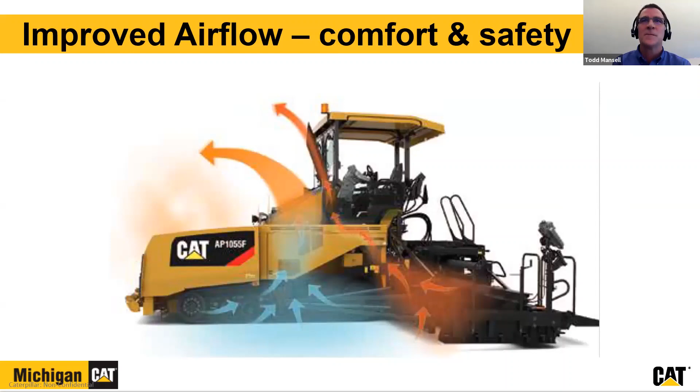Same with the airflow - again, you'll see this with most manufacturers now putting more consideration into the airflow around the machine itself. Fans sucking that hot air and fumes from down around the screed operators and expelling it out the top or somewhere away from the operators on the screed.

Again, just little things to make it simpler. It's one button push now instead of having to push all 4 buttons, unless you only need the auto feed on the right side, for example.

So, a little better safety device now - it's in neutral, but this is for clean out and warm up. It just runs conveyors and augers at a slow speed to get the oil and chains heated up, or again to clean out.

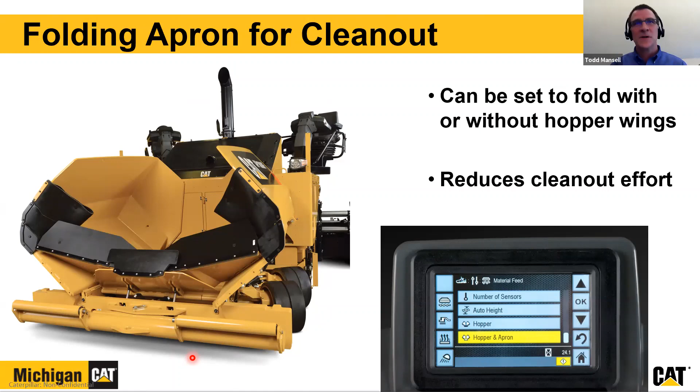So at the end of the day, a lot less strain. Again, I'd say it's a bit more of an ease of work, maybe even a bit of a safety thing if you're worried about somebody putting their back out on that.

And languages - so we've got a lot of crews, and, you know, English isn't always our first language.

For the comfort and quality of the paving we're doing, we've got options of different languages on the operator's console and the screed consoles to help people understand the menus and everything they're going into, and control the operator better if English isn't their first language.

Dual operator stations, nothing big there, that's been around for a long time. What is kind of new in the latest generation of equipment has just become available now because we have CAN bus systems and electronics on the machines. CAN bus, controller area network, basically everything's controlled by computer somewhere along the line. That enables us to do a lot of these features and comfort type things we never had in the past.

In this example, you could have all your conveyor settings, and if you move to the other side on the operator station, all that's carried with you. In the old days, you'd have to go to the other side and then reset your conveyors and feed system and all that stuff.

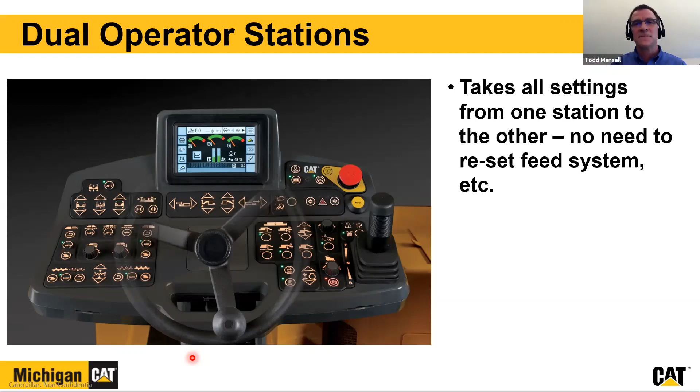Personal preferences, I'm not going to go through all these. Because of computers and CAN bus systems on the equipment now, there's a bazillion things we can go in and customize. Timers are a nice one - we've had these in the past too, but there's a lot more now. We've got timers for delay on the grade control system, idle, throttle up, throttle down, screed vibration - when that kicks in after I leave neutral - we can go spray down. So there's a million things we can customize now, not only for personal preference, but to gear it or fine tune it more to our operation.

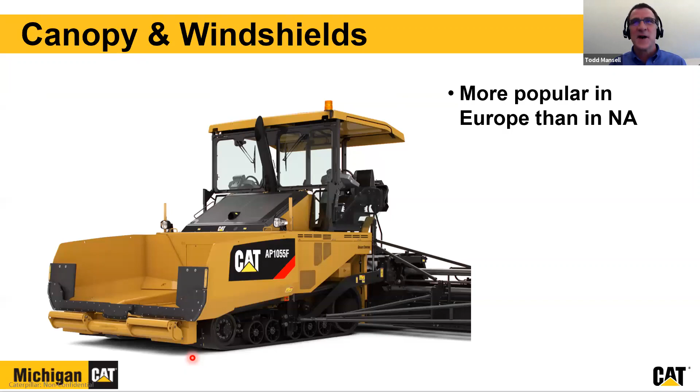Canopies are more of a European thing, but you can get cabs and windshields on pavers. Again, it's just a comfort thing really for operators.

Screed heat has been around ever since pavers have been around, but electric screed heat in the last 20 some odd years has been fairly standard. What we've done here is integrated the generators with the engines now, so they're not a standalone generator. That's really done two things: reduced a lot of fuel consumption for that electric power for the screed heat and other auxiliary power like your lights, and also made the noise levels in and around the machine a lot lower - much lower decibels when you're around that equipment.

Service and maintenance wise, remote grease fittings, and cooling systems that get that hot air out and away from the operators. Variable speed cooling fans - stuff we didn't have years ago on some of the older machines.

Quick change heating elements - this is a big one from a service end. No need to remove the screed plates. These heating elements just slide out and the new ones slide back in, without having to remove and replace screed plates and reset those.

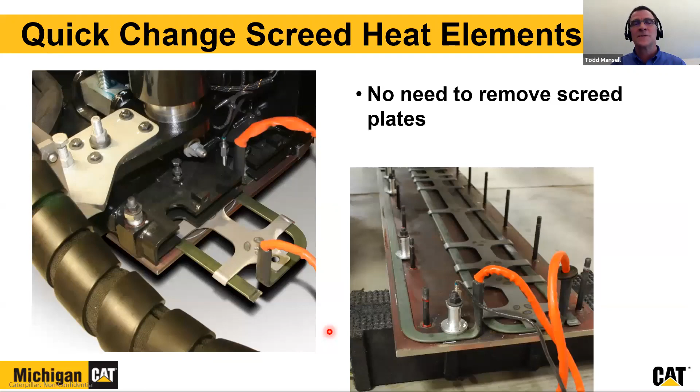Service calibrations, diagnostics - because of computers on machines now, we can do a lot more in terms of diagnosing, or at least helping the mechanics ahead of time. Long story short, the machine will tell us a lot of what's going on or going wrong if something's going bad on us, or if we need to do a calibration, and we can let the mechanics know ahead of time before they even get there. We've got codes, literally written codes, not just a number, but it might say screed heat element or something like that to help out on the service end.

Don't worry, all this electronics kind of scares me too on my new vehicle that I drive, but they still have what I call the limp home features. You've still got mechanical toggle switches underneath the console that if the electronics, propel, steering, any of that failed, you can still run the mix out and actually still pave with it. Wouldn't be real convenient, but you can get rid of that mix and still get the machine, get some trucks emptied, get the machine off the road if you had to.

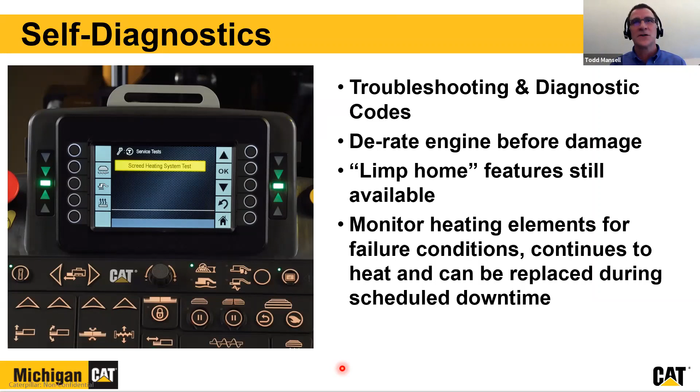Telematics, expanding on what I just talked about in terms of diagnostics, all kinds of information on the machine. When we get to telematics, it's basically remote monitoring. So all of those codes that you can see as an operator on the equipment are also available remotely to the dealership or the owner of the machine. You can log in, get alerts, all that type of stuff online, in terms of product maintenance, and alerts on fuel levels, error codes, all that type of stuff.

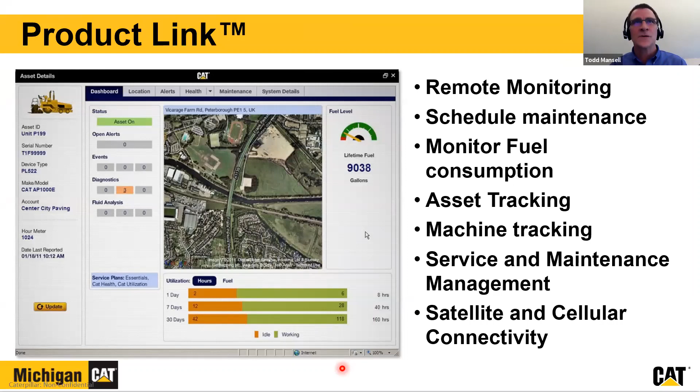Smooth tracks, not a lot to really talk about here. They've been around for a long time. I personally really like the smooth track pavers, good flotation, good traction, and all of that. High wear options for screed plates and floor plates on your paver are available, and all the manufacturers offer that, with even aftermarket versions available as well.

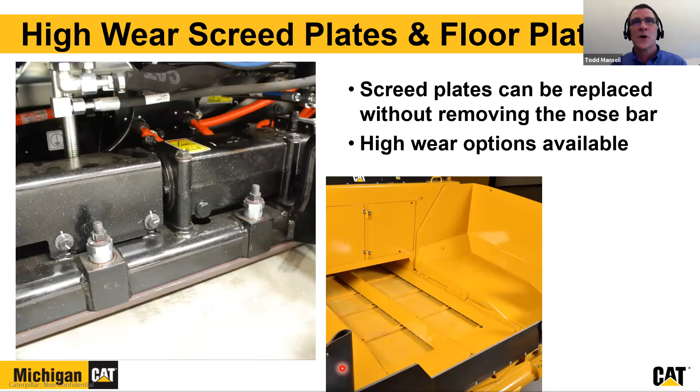One thing I do like here is what we call a lockout feature. On the screed operator's console, we get everything set up and we're paving along. Every once in a while you've got your hand on there or accidentally hit something. The one I've seen hit the most is either auger height, extender slope, or crown. So you can lock those things out, and it doesn't mean you have to have a code to get back in - you just hit the lock button. So if I accidentally hit the crown or something, I'm not going to mess up my mat. You just tap the unlock button and then you can go in and use those features you temporarily locked out. It's a handy safety type thing so you don't screw up your mat by accident when you're paving along.

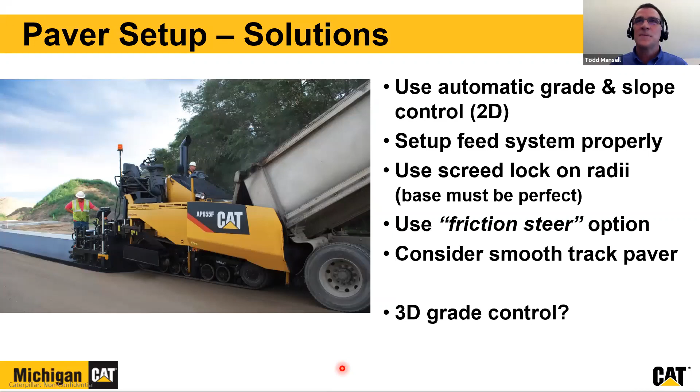On the paver setup, I'll talk about a few things here. One is integrated automatic grade and slope systems - very handy compared to having the left and right screed control boxes that actually had the computers in them. Now with the integrated system, the computer is on the machine. No need to have a left side box and a right side box to keep calibrated with that machine. It just simplifies things a little bit, and of course gives a more simplified user interface.

One thing that's different with the newer grade control system is the operator up top on the tractor can operate it. It's a little clumsy for him to do it, and it's intentionally that way, but they can control it from the operator station, both sides. And of course down on the bottom, you can control it from the left side or the right side. You've got the split screen mode where you can monitor and control both sides on the grade and slope from one side. That's a handy feature - it's a good way to get the guy on the left side fired if you're on the right side and you mess up his grade, but it is a handy feature. If somebody doesn't show up for work one day, or needs to go do something else, you can at least monitor the other side and control it if you had to for a little bit.

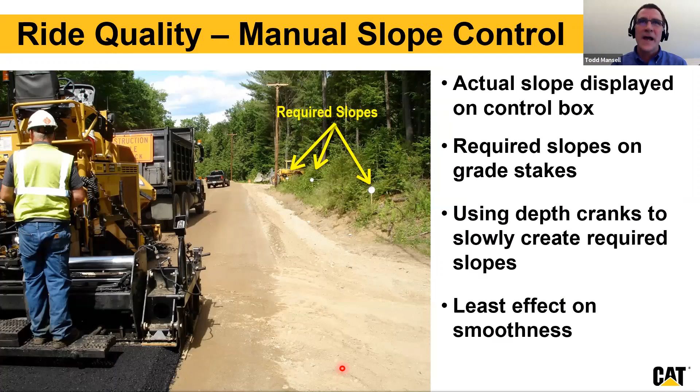Another thing I like with the large displays now on the grade and slope systems is the ability - this guy is just going through a super elevation. He's got pie plates marked out, so he's changing slope manually, but he's using the automatic grade and slope system to look ahead and actually see on the screen where he needs to be. He's looking at pie plates, but he's got the big display now, which we never used to have, so even if he's controlling it manually, he can still view the actual value on the screen instead of dropping his level on the mat constantly, and get a smoother transition. We could do this in the past, it's just easier and easier to do now.

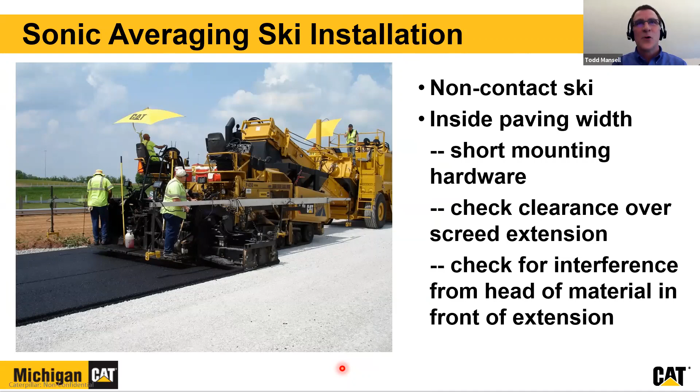Sonic averaging ski, nothing new there, but most of us are using sonic averaging skis now on our machines. They're portable, easy to set up. Big thing here is inside the paving width, whereas when we get to a contact or a drag ski, we're going to be outside our paving width. I've seen jobs where we're running a drag ski on one side and a sonic ski on the other, so you can mix and match. Lots of ways of doing that. But again, there's nothing new. These have been around for years, but I just wanted to cover them on the grade and slope system.

One nice thing from a diagnostics or connectivity standpoint on the new machines is you're able to see everything that's connected. On this screen, it's showing grade and slope displays up at the operator station, the left and right on the screed operator, showing the slope box is connected, showing a grade sensor on the right side, and then the one in red in the top left is telling you that it's not connected. So the machine saw that sensor, it's no longer seeing it. Maybe a cut cable, something shorted out, who knows, but for whatever reason the machine's not seeing it now. So for those of us who remember swapping cables and all that, this makes life a lot faster and a lot easier than going through all that trial and error, trying to figure out if a sensor's bad or a connector or a harness.

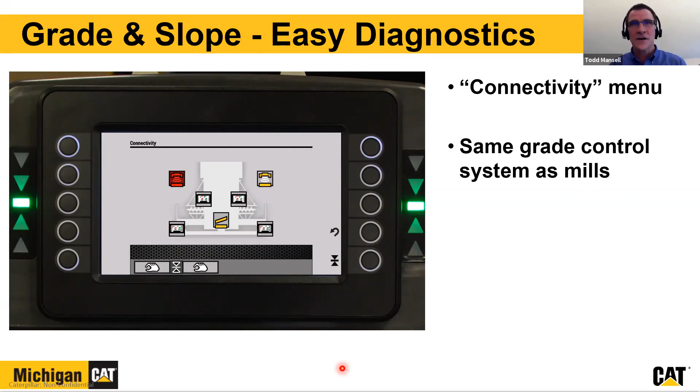There's a busy screen showing a lot of things, but when we get into automatic grade and slope, it's also calibrations. I'm not going to get into the details, but basically the valve tow point cylinder calibrations for automatic grade and slope is a fairly automated process now. We park the paver on level ground, null it out, go into the menu to calibrate that tow point cylinder with the grade and slope system. We only do this once a season, maybe once every time I get on a quote high profile job. Only takes about 10 minutes or so once you get set up and on level ground and nulled out, but it's all automated. You just hit go and it walks you through the menu to calibrate the tow point cylinder with the grade and slope system. Normally we're only doing this if we change out a tow point cylinder, a solenoid, anything wiring to do with the tow point control or the grade and slope system. But I'm doing it on a big job before I get started because it doesn't take long, and it just makes me feel better that my grade and slope system's calibrated to work properly with the tow point cylinders.

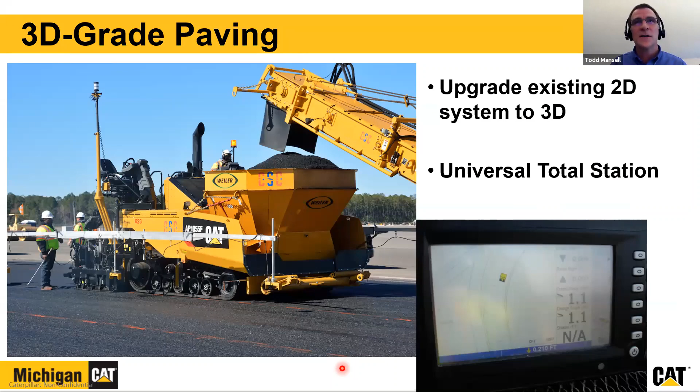3D paving, I know Nars is going to talk about this, so I'm going to skip over it. Just one slide here to show that it is a thing that we're using these days in paving.

Counterbalance puts uplift pressure on those screed cylinders, basically makes the screed a little bit lighter, if you will. But counterbalance is not something we typically want to use. Maybe in a fine sandy mix where that screed settles, or that mix isn't supporting the full weight of that screed. But typically, not something we want to use. If we're getting a screed settlement mark when the paver stops between trucks and that breakdown roller takes it out on the first pass, don't even worry about using counterbalance.

Because every time we use counterbalance or screed hold or screed lock, which is a newer feature on there - counterbalance is on constantly, or 100% of the time when you're paving. Screed lock or screed hold only engages when you come to neutral. So you could use it to minimize the amount of any screed marking or screed settlement when the paver stops, but it's still not a cure-all for a screed settlement mark. You might not have the mark there, but you're also going to have a bit of variation in your compaction, because that screed was locked or held in position until you left neutral and took off again. And of course, paver stops regardless, you've got different temperature zones there where the paver stopped, which will also affect compaction.

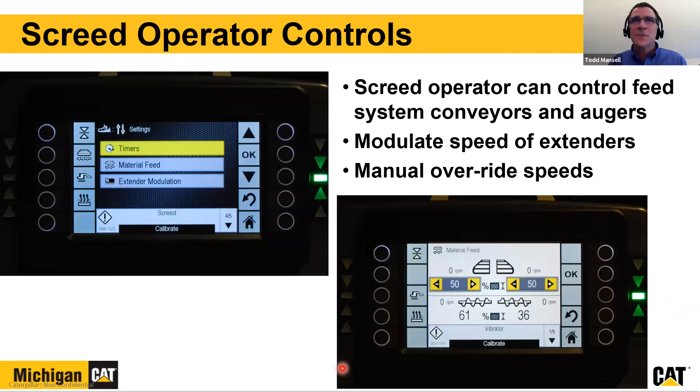Just going to slam through a few of these things. Modulating speed of extenders is nice because when we get to smoothness, it affects how fast you wing in and out.

If we're doing variable width, ideally we try to stay at constant width on a smoothness job. But if we're winging in and out every time I bump those extenders, it affects my IRI. So we can modulate the extender speed to go faster or slower depending on the type of paving we're doing.

I think my picture's missing here, but we've also got the manual overrides. In the past, manual overrides were on or off, and that's still true. If you run the manual override, it's going to bring that mix and conveyors back at full blast.

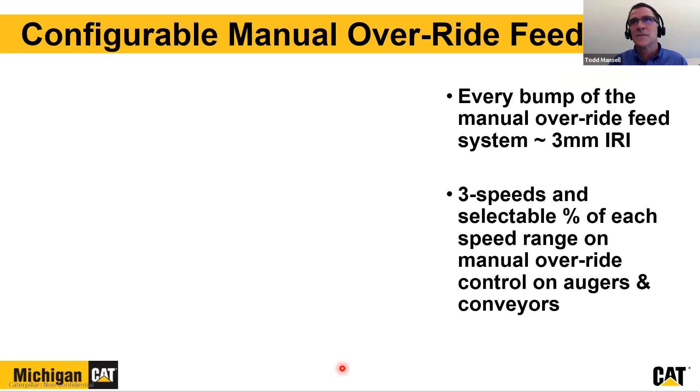But now we can set the manual overrides so that when I do hit it, it's not running those augers at 160 RPM. It's still going to run them fast, but we've got different ranges now that we can select, so it's not as aggressive. It's not actually throwing rocks and affecting our ride quality when we use those manual overrides.

It's got friction steer. That basically locks the steering of the paver at a certain percent of turn, like when we're going through radiuses and things like that. So that's a nice option now to hold a constant radius, or even doing an off ramp or something that's a constant radius, we can lock that.

Feed sensors - I was on a job a week and a half ago, and they didn't have their sonic feed sensors for bringing the mix back. These guys were running their manual feeds constantly all day until they got a new feed sensor.

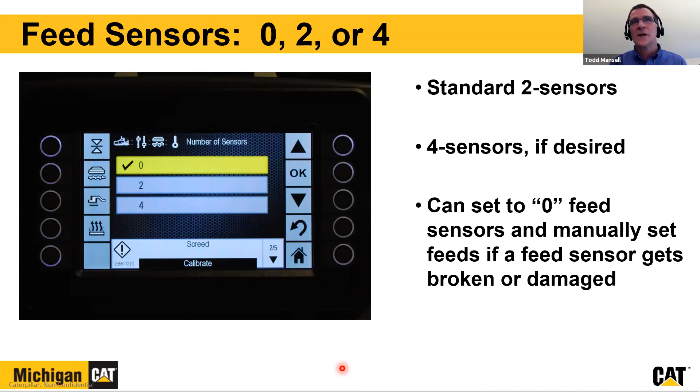Now, on the new machines, you can just set the feed sensors to 0, manually set your conveyor and auger speed, and then you don't have to constantly run those manual overrides and again affect your smoothness.

Lots of different anti-segregation kits and setups, and it just depends on the manufacturer and what issue you might be having. So if you've got centerline striping or different things like that, there's all kinds of different setups you can get.

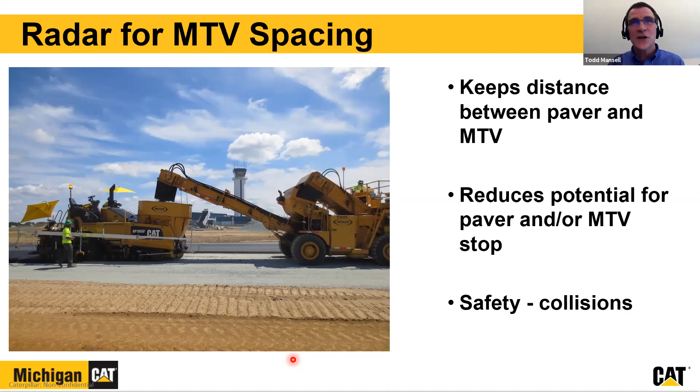The big thing here, you could probably minimize paver stops or even transfer vehicle stops, even though we're using a transfer vehicle. Every time we have to stop the pavers, it affects our quality.

Being able to set our paver speed in advance - on the old machines, you had to speed dial up to your paving speed from 0 when you started out. Now you can preset it before you leave neutral on your initial takeoff, and that's even going to help your takeoff.

Other things, we got wide width kits, and I'm not going to get into the details on this, but a lot of times I see people paving wide on jobs when they should be set up with auger and tunnel extensions for the wide width paving, and kits are available.

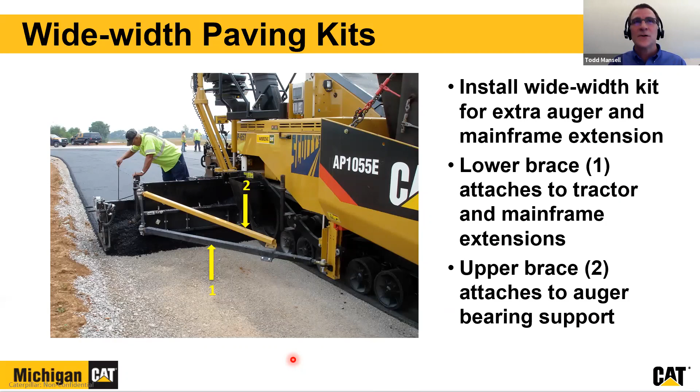And again, it's all about quality, right? So we look down on the top and manage that head of material to half auger height all the way out to the end gate.

And screed heat - I'm just going to skip through this, but it's again more user-friendly nowadays on the new machines because it shows our actual screed plate temperatures as they're heating up, and then they turn green once they're heated up and we're ready to go.

So that's all that electric screed. You turn it on now and you just forget it. The generator, part of the engine, will kick on and off automatically as needed when and if the screed plates need to be heated up during paving. Once we get going, it's pretty much the heat of the mix that's keeping those screed plates hot.

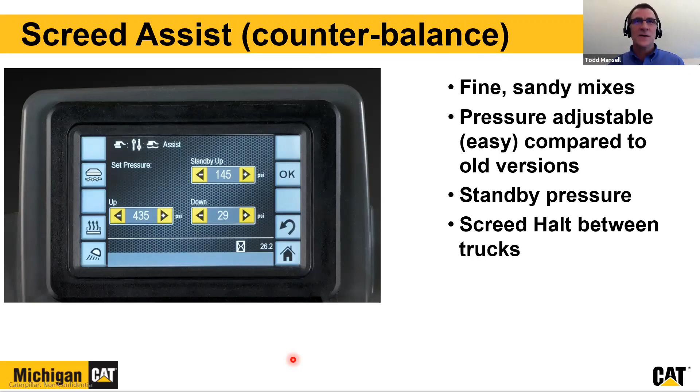There's the screed assist I mentioned earlier, or the screed lock, either function. We can go in and set that uplift pressure, how much we're gonna put on those cylinders that raise and lower the screed, to hold it in place and minimize settling, or to help us when paving that fine sandy mix that doesn't want to support the screed very well. It's configurable, all the pressures, and it always has been, but it's a lot easier now to do from the screen than going down underneath the deck.

Hill hold is a nice feature if you're paving on grades, especially uphill. Once the paver stops, or is pushing a truck and stops, or the truck takes off, the paver wants to roll back a little, and the screed might leave a screed mark in the mat, a bump we can't get out. The hill hold feature holds the brake on for 2 seconds after you leave neutral when you start back up, preventing the paver from rolling back and leaving a screed mark that might affect our smoothness.

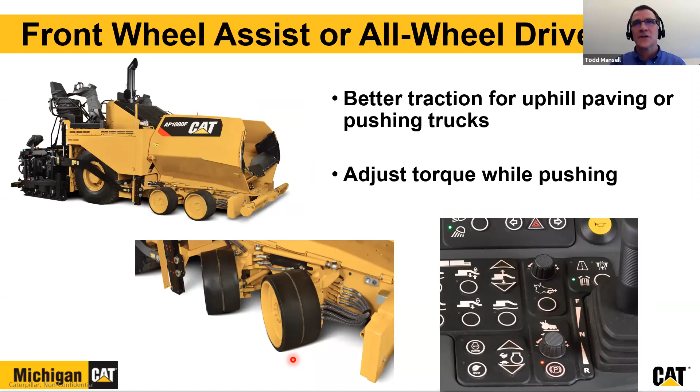Front wheel assist, if you're on the wheel pavers, gives you two wheels, or you've got all wheel drive, which is all 4 front bogies. Again, it's really just for traction, or if we're doing a lot of uphill paving, and you can adjust the torque on those bogies as you're paving to the point where they're not going to slip, so you get the maximum amount of push going uphill.

Low entry hopper is again just optional, whether you get a conventional hopper height or what we call a low entry hopper, depending on the trucks you're using.

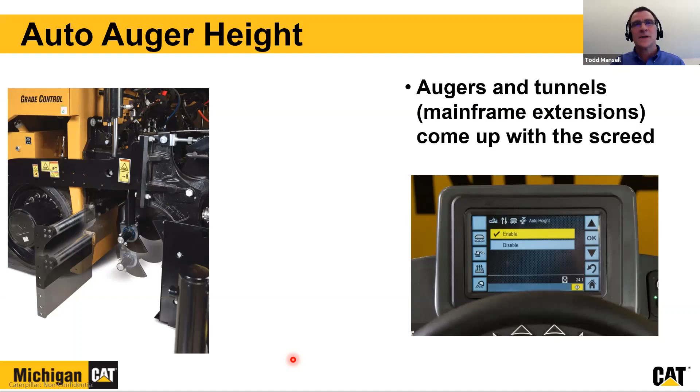Augers and mainframe tunnels have been able to raise and lower together. You get the auto raise and lower, which you can enable or disable, so when you pick the screed up, you're not forgetting to pick the augers up and then hitting something with them when moving the paver, breaking them. I think NARS is going to talk about the screed itself, so I'm not going to get into that.

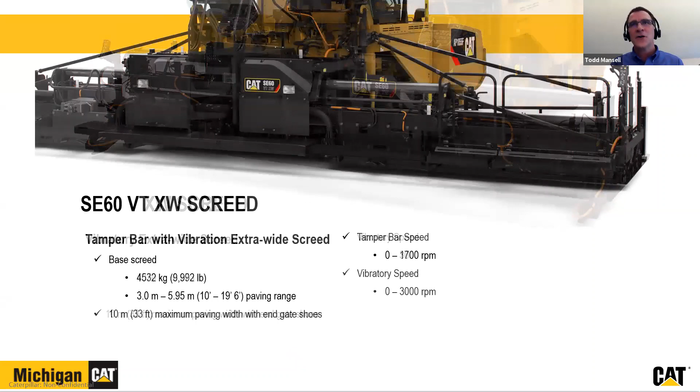A few things quick on the screed, not going to get into details here. This is just showing a vibratory screed. There's a lot of different options for screed widths nowadays. It's got an extra wide, XW, setup. The last one you could go to maximum on this one is 24.5 feet. Get the extra wide setup and you can go out to 33 feet or 10 meters. You can also get tamper screed versions with the tamper bar in them, with speed settings on the tamper. They're more of a European type screed with the tamper screeds.

A few things on end gates: hydraulic end gates are nice, a lot of crews like them. They're fast reacting, or can be fast to raise and lower, as opposed to cranking, and you don't have to get out in traffic to raise and lower those end gates. The heated end gates are nice too, keeping those springs clean so they're always free, so I can keep that end gate down and get a nice longitudinal joint. There are even foldable end gates that fold in behind to help with transport width.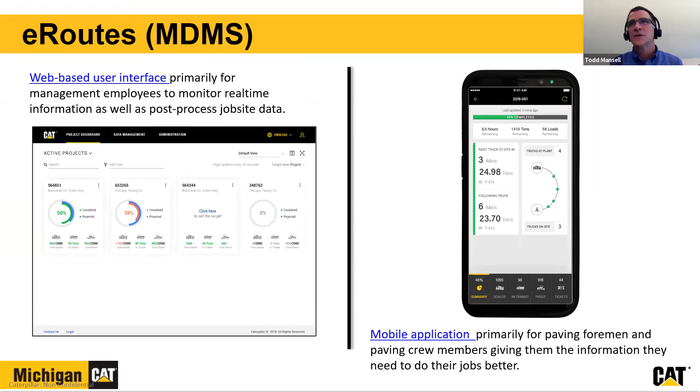A few things quick on material data management. NARS is going to cover this, so I'm just going to blow through these slides. This is one version where you've got the e-routes, with a desktop version and a mobile app version. I'll just say in short, what's really nice about it is it gives you so many ways of managing the job and the trucking in real time.

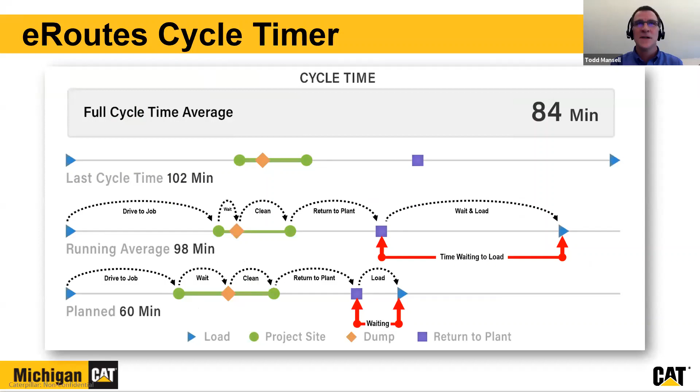And to me, that's really the power of these material data management systems: finding out where loads are, when the next truck's going to be there, all that good stuff. And then there's lots of stuff you can drill down with later in the office to try and improve, fine tune your operation, figure out where the weak spots are, and become more efficient in terms of quality and cost.

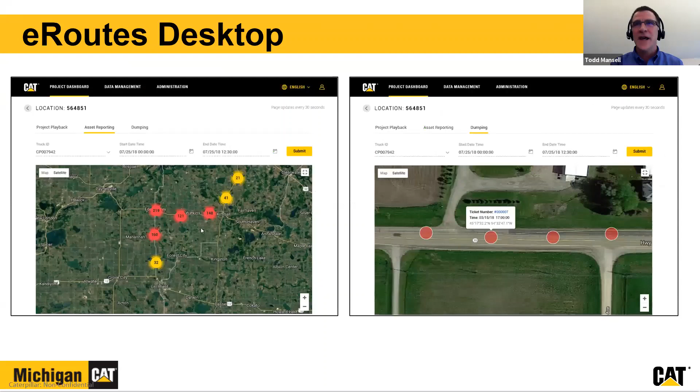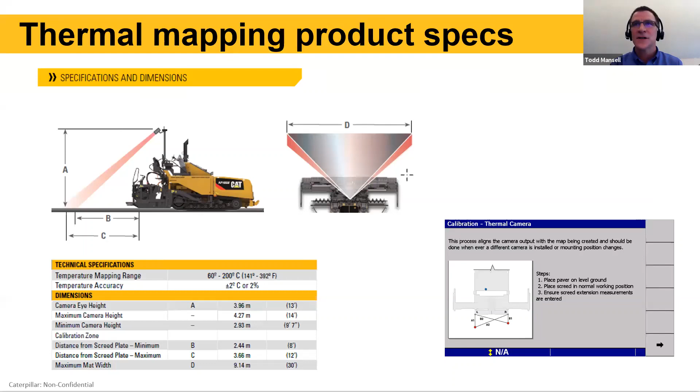Paver mounted thermal, and I'll close out with this. So this is paver mounted thermal profiling. Here we're just looking at a thermal camera on a paver, and specifications like height and accuracy can be adjusted to different paving widths or mat widths. It's an infrared camera monitoring the surface temperature of the mat as we're paving. Again, to me, the power in this is real-time information on the machine while we're paving.

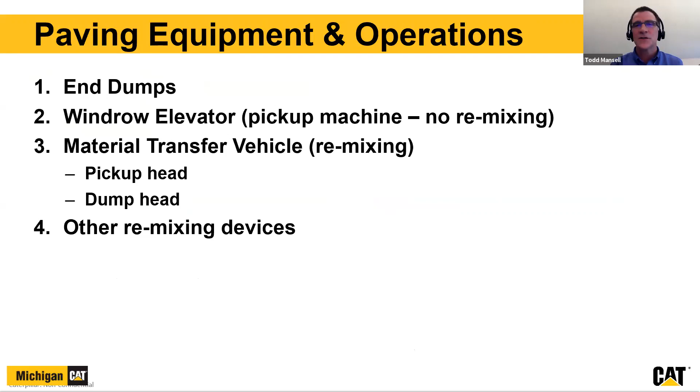I'm not going to go through all the words here because I just have a couple slides I wanted to show you, a few examples of what I've seen or used. Everything here will be available after for anybody who wants to go through all these bullet points. But what I want to point out is a couple examples. With the thermal profiling, I can look at my paving operation if I'm using end dumps, windrow elevator, transfer vehicle, and see what's doing well for me. Because what does uniformity of temperature affect? Uniformity of compaction, right? And our smoothness.

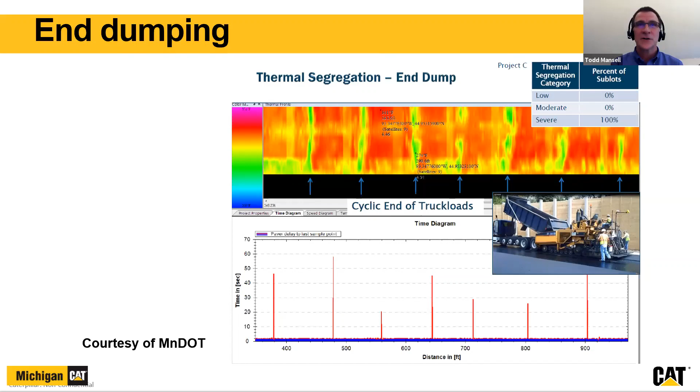So looking at different patterns, this is one from MnDOT, showing paver stops and end dumping. You can look at the thermal data. The low-hanging fruit on this for me is actually just looking at the number of paver stops and how many minutes I was stopped.

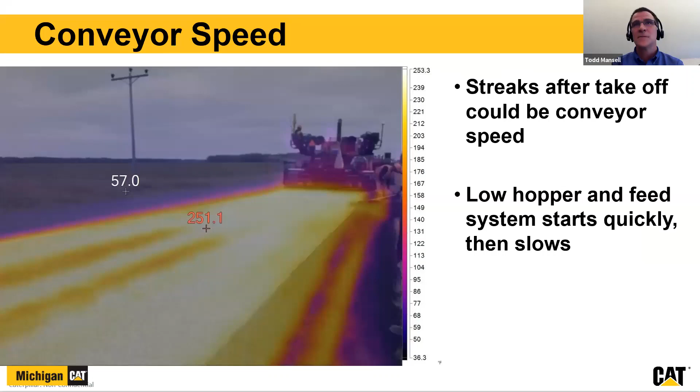And conveyor speed: if I look at a pattern and I start seeing streaks in my mat thermal, I can look back and determine whether my feed system, my feed sensors, are aimed right, like my augers are coming on and off, or my conveyor speeds are too fast or too slow. So there's a lot of things I can quickly pick up about the operation of the paver and the screed, just by looking at that thermal data in real time while I'm on the paver.

So I know I blew through a lot of things there, and I apologize for being fast. But with that, I will finish up here and turn it back to Brett.

So next, our next presenter is Nars. Nars joined the asphalt industry in 1990 as a project engineer with Ingersoll Rand's Paver division, where he led the development of asphalt pavers. He has also held positions with other paving companies as paving applications engineer, product support manager, and product manager. Nars is currently employed with Vögele America as application and technology specialist. His responsibilities include developing product specifications and providing support for paving applications and intelligent construction technologies.

The one thing, Nars, I'll turn it over to you. And I want to make sure the one thing I want to get out of this is how to appropriately pronounce Vögele. You did good. Vögele. All right, thank you. It's all yours, Nars. All right, I'll take it from here.

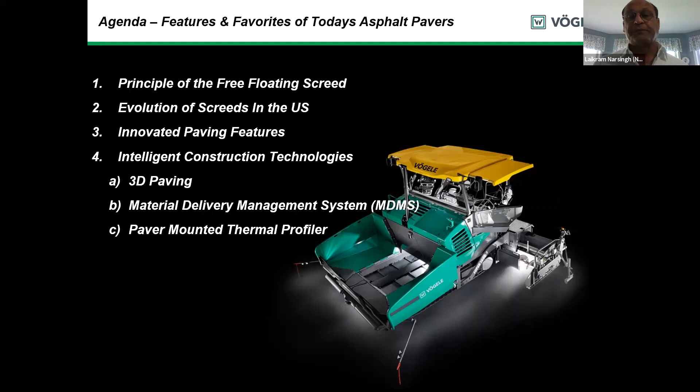So I always like to get back to basics. These are the things that force us to do what we do today: the 5 forces that hold the screed to grade. We all know there is no mechanical or hydraulic lock that holds the free floating screed to grade. It's held to grade by 5 forces.

Consistency is one of the most important things relative to a consistent mat, consistent density and smoothness. The weight of the screed is always constant. The head of material, we always have good controls to allow you to balance the head of material. It's the pull force and the reaction and frictional force that are forcing us to use more technology today to help us manage these forces.

Why are some of these things forcing us to do what we do today? Temperature, like Todd says earlier. Temperature consistency is critical for consistency or consistent performance of the screed and rolling. What's happening when the screed is compacting the material?

If you look in front of the screed, they all have a strike off. The strike off shears off that amount of material, allowing it to flow under the screed. Due to the angle of attack and the radius or bullnose of the screed plates, we get our compaction from that point to that point. What's happening in that process is the larger stones are sliding against the fines, using the asphalt as a lubricant to gain compaction, or to give you your final compaction at the trailing edge of the screed plate. And then, of course, the roller comes along to give you your final compaction.

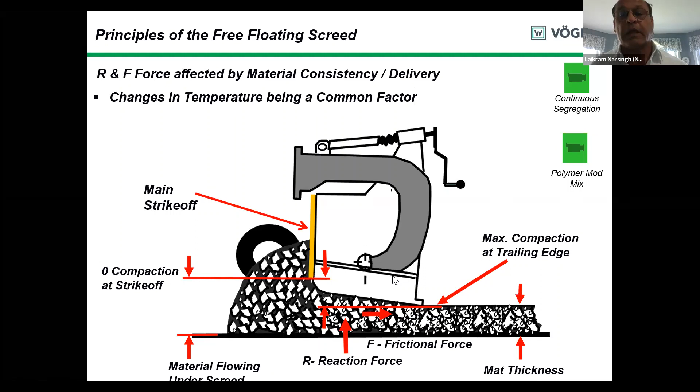If I can play this video and if it will work. I don't know if you guys could see it. As you can see, we're not seeing that, Nars. You can't see it? No. All right, maybe you should unshare and then share that all applications.

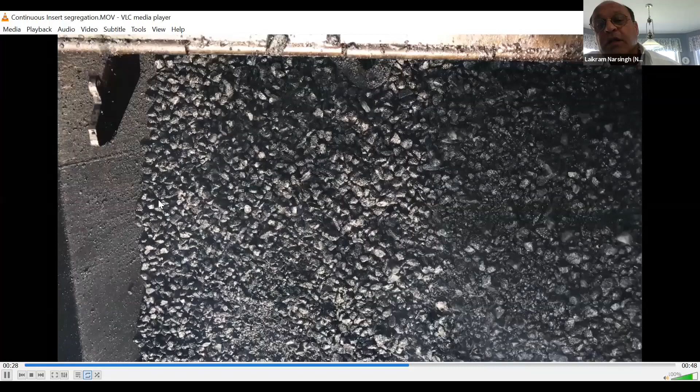Right now, there it is. Yep, so you can see the larger stones are sliding and rolling a whole lot easier because the viscosity is not there to hold it together. If we get into another mix design with more higher viscosity, then those larger aggregates will not roll as much. So that is just looking into what's going on.

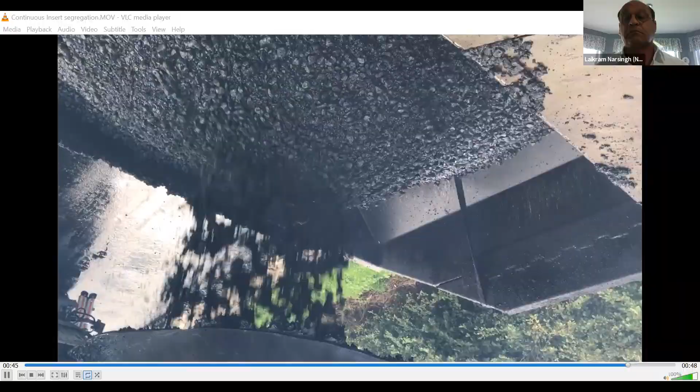All right, I will have to find a way to... I'll get back in there. All right, I hope you guys can see me again. Yep, we can see you.

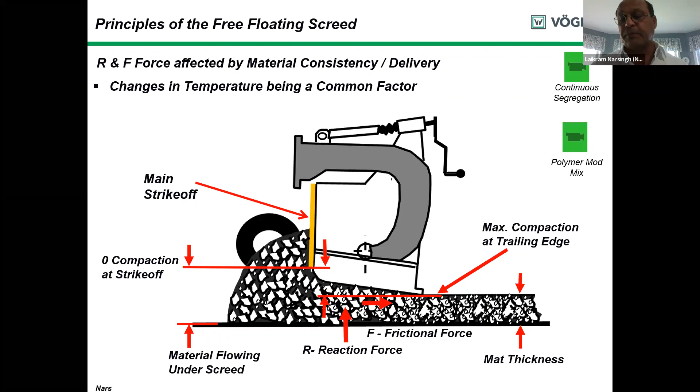Okay, so what's happening there is this: if the temperature changes, the viscosity changes, and the ability of the aggregate to move becomes more difficult, affecting screed compaction and the final compaction from the roller. We'll get back into that discussion when we talk about intelligent construction technologies.

Now let's look at the different types of screeds out there. Today we have two of the most popular types: rear mount screeds and front mount screeds. Rear mount screeds have the extension towards the back of the end gates. One of the big challenges with these types of screeds is when you're doing commercial type work and constantly extending and retracting, it's difficult to manage this material to allow you to retract if you're running out to catch a driveway or around a mailbox or an island or anything like that.

You also have a much longer end gate, so your handwork tends to increase more significantly when you're doing commercial type work. These are referred to as front mount screeds, but equal width front mount screeds, where the front to back dimension of the extension is the same as the front to back dimension of the main screed.

But you have a much shorter end gate, so from that standpoint your handwork is minimized. However, you have material management to deal with in the middle here, as opposed to a rear mount screed where it's out here - you can see it, you can manage it, you can shovel it out. In this case, you can't.

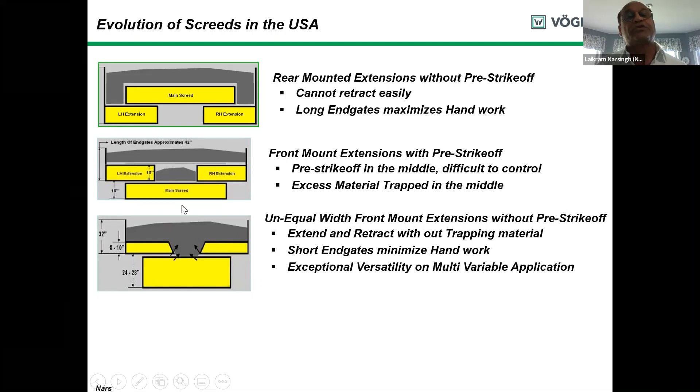So this type of screed has evolved into what we refer to as unequal width front mount screeds. These have a much narrower extension, so there's no need for a strike-off in the middle. And if you notice, the inside is tapered, so as you extend and retract, that material pushes forward and does not get trapped. This seems to be the most popular screed today.

In the past, there was always a perception that these types of screeds are not real screeds. Well, if you recall the 5 forces that hold the screed to grade, weight of the screed is one of them - not weight front mount or weight rear mount, just weight. As long as the screeds are rigid enough, the performance in terms of smoothness and density is no different whether it's front mount or rear mount. The advantage is versatility.

These are referred to as compaction and high compaction screeds. Compaction screeds have a tamper bar, a moving device that sits in front of the screed and moves up and down to give you compaction. High compaction screeds have the tamper bar and also multiple pressure bars at the back. With these types of screeds, you can achieve up to 100% density.

Now, with a high compaction screed, you could pull 2 lifts at the same time. One paver with a high compaction screed in the front, doing your binder 3-4 inches. A second paver roughly 4 feet behind the first, laying your surface mix. The paver in the front has a transfer conveyor sitting on top of it, which transfers your surface mix over to the paver at the back. That type of technology is being used in Europe today.

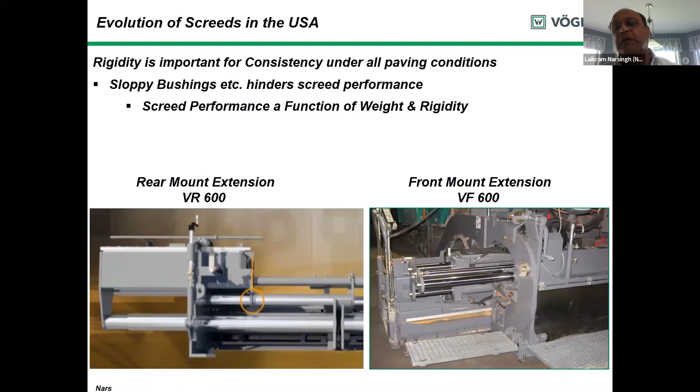So rigidity is what's important, whether it's front mount or rear mount screed. If you have rigid guide tubes with no sloppy bushings, the performance will be the same as long as the weight is there and all the adjustments are correct. So whether it's a rear mount screed, you can pave up to 28 feet wide, pulling 2 lanes. Whether it's a front mount screed, you could pull 28 feet wide again, doing 2 lanes.

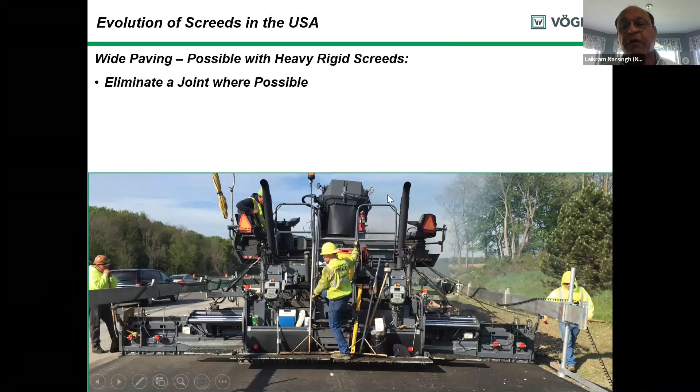This is a project through Columbus, Ohio, pulling 2 lanes at the same time with a front mount screed. Same with a front mount screed, pulling a 7-foot shoulder together with a 12-foot main line. So if you have the rigidity and the weight, you can pull 2 lanes, you can pull a shoulder in the lane, you can eliminate a joint, which we all know is the first place to have failures.

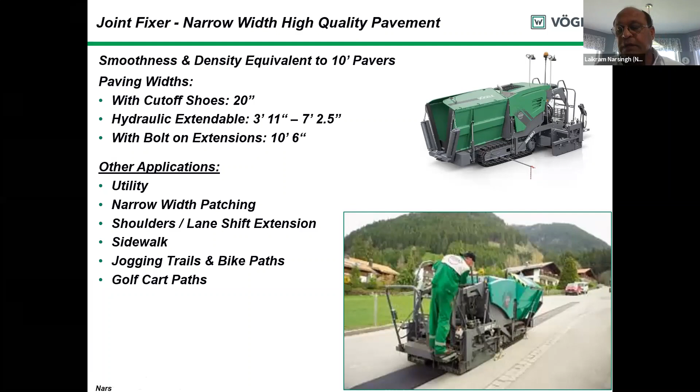If you do a bad job and you have to fix it, then we have the fixer-upper paver - a high quality, narrow width paver that could pave a minimum 20 inches wide, so you can mill off the failed joint and put it back on with a high quality screed, 20 inches wide. The same paver could also go up to 7.25 feet wide, or with some bolt-on extensions up to 10.5 feet. It can be used for different applications: utility patching, narrow width patching, shoulders for lane shift during construction, sidewalks, jogging trails, golf cart paths. So all of it becomes available with a narrow width, high quality paver.

So those are some of the slides to describe what we do with screeds today in our industry, from front mount to rear mount, compaction, high compaction screeds.

Now we'll look at paver controls, past and current. In the past, we had toggle switches, hydraulic joysticks, a few toggle switches in the screed. That was about 30 years ago.

Today, we have what we refer to as intelligent machine controls, more than likely CANBUS control. With that, it allows us to perform intelligent construction that the feds are pushing, referred to as intelligent construction technologies. Whether it's a tractor control or a screed control, it's all intelligent machine control.

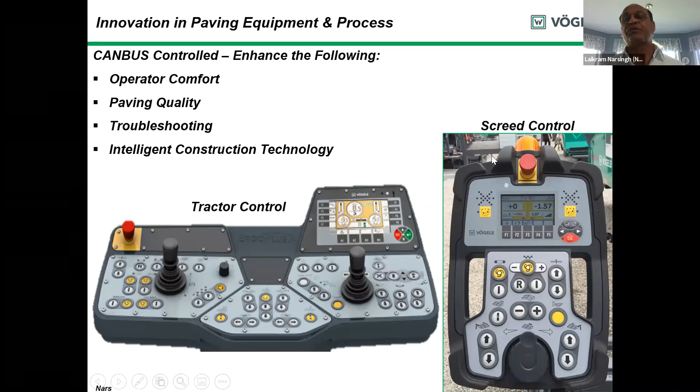With CANBUS control, we can improve operator comfort, improve paving quality, improve troubleshooting. We all know when a paver goes down, we have 10 trucks in front of it. It's very important to get the paver back up and running to save those loads. And that will allow us to involve intelligent construction technology on your screed control and tractor control.

We also give you a remote control. You can hold it in your hands and walk along the paver and perform all your paving functions. Get off the heat, get off the vibration. No need for you to stand there. I'll come back to this control a bit later to show all the different functions we have on it.

Here you can see we have duplicate auger and conveyor, toe point up and down. If you're an automatic grade and slope control, this allows you to increase or decrease your mat depth. We have screed extensions, hydraulic tunnel, berm. If you're in berm country, Michigan is berm country. We have slope, match height, and lockout for all those functions.

So if you accidentally hit the switch, it sees the function. It's mounted, it's magnetic backed. You could mount it anywhere there is steel, but there's a bracket on the end gate. So you can walk along the paver, grab it, move along the paver, and perform all your paving functions.

What are some of the other technology we have that makes your life easy? Cummins Tier 4 technology, 250 horse, no DPF, but it has a DEF and an SCR, no DPF, which means no need to bother about regen for a DPF.

You also have an economy mode, 235 horsepower at 1700 RPM, reduce noise, reduce wear and tear, but enough horsepower to get all your functions, all the paving functions.

We also have a hydraulic driven fan controlled by the coolant temperature, air temperature, that allows you to again reduce noise, reduce wear and tear, and reduce fuel consumption. We also have a clutch that's between the pump drive gearbox.

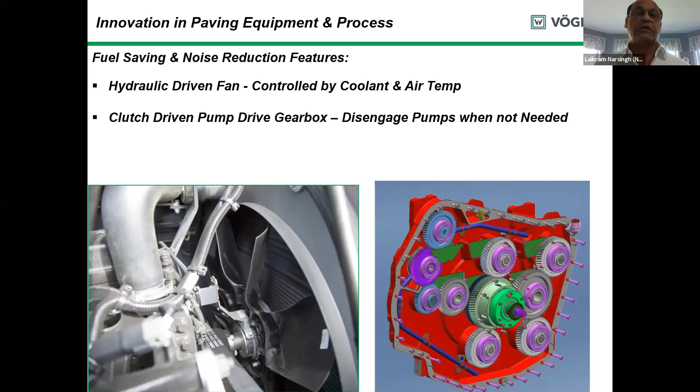Some ease of operation features, trim steer. Todd talked earlier about the brake on the steering wheel. Similar feature, ensures smooth radius in turns. Why do we want that? If we're zigzagging through the turn, then our screed is moving side to side. We break those five forces in equilibrium, we end up in a rough ride. So it's always important to hold a nice smooth turn into a nice smooth radius into a super elevated turn.

Same control, display your head of material. As you run low in your tunnel, you see your bar chart gets empty. That means you're low and should stop paving. One of the things we talked about earlier is your material delivery management system to ensure consistency of material feed, and again to keep those five forces in equilibrium.

Also displays the toe point position to avoid twisting in your screed when you're setting at the joint. So your toe point is being displayed up here. Also on your screed control, you have the same display so the operator can see exactly where his toe points are at to avoid twisting.

Screed hold and screed freeze. Whenever the operator pulls the F&R lever to neutral, the screed goes into a hydraulic lock so you don't have any settling. As the operator takes off, the screed stays locked for about 4 seconds or 18 inches, so it does not give you a hump.

When we stop, like we said earlier, the temperature, the mix gets cooler, the viscosity gets stiffer, and your reaction force increases. So with the screed freeze, it holds the screed to grade and prevents it from climbing as it goes through that colder head of material, and does not give you a hump.

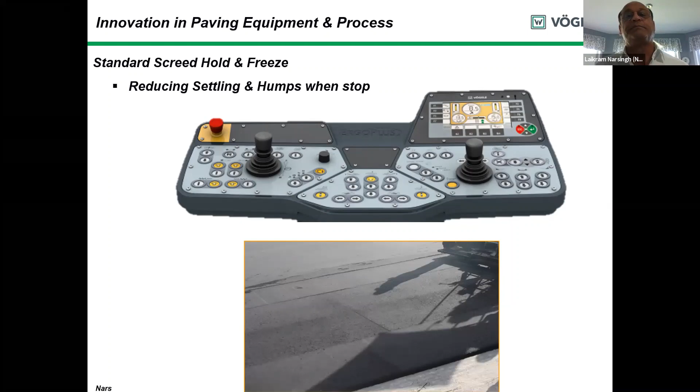Track plow, makes it easy on you. You don't have to step in front of the tracks with a shovel when you have piles in there. You just drop it in the morning, pick it back up in the afternoon so you don't run over curbs and tear it up. It's a simple tool that allows you to achieve a smoother ride with less work.

So those are some features on the paver that help you perform a better job and improve on quality and smoothness. Now we'll look at some innovation in paving equipment and process.

A material management system we'll talk about a bit later. For ease of operation, you have automatic, manual, and on-off controls for your auger and conveyor in three different locations: on your tractor control, on your screed control, and on your remote control.

We also allow you to set your material height. It's hidden at the back here on the auger sensor, so you can set your material height at that position, and you can also set it on the screed control. Whenever you hit the plus or minus sign, the screen that shows your percentage automatically pops up so you don't have to flip through screens to find it.

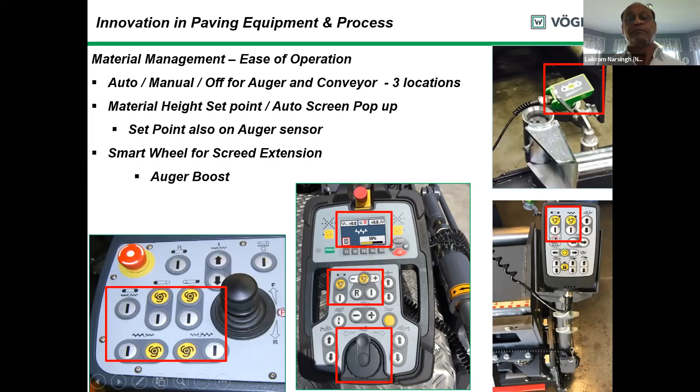We also have the smart wheel that allows you to slowly run your extension in and out if you're trying to match a joint, so you don't disturb those five forces in equilibrium again. Or if you're going out to catch a driveway, you hold it down and it doubles your speed and also boosts your augers, because it knows you're going out and need more material, so it kicks your augers up an additional 40% if it's not already at max.

So those are some of the features that help you with material management.

Again, for ease of operation on the operator side, there's a hydraulic tunnel so you don't have to go in there and clean that front up with a shovel constantly. You just touch the center switch and it pops that front apron up about 60 degrees and dumps that material back into the flight chain. You could individually run each hopper, or if you hold that switch down constantly, the front will come up and then your two hoppers will come up. Makes life easier for you during the day.

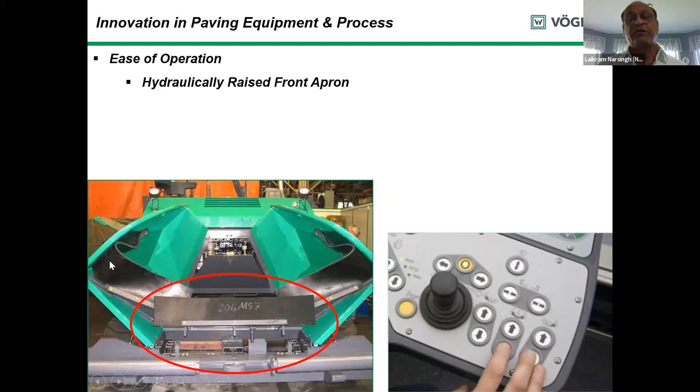Another feature that helps you reduce your effort at the end of the day is an automatic greasing system that greases the feeder bearings, just the feeder bearings.

Some diagnostic systems we put on the paver. Why? Because we know the paver will go down—it's built by human beings. But if it does go down, we give you easy access to all the valves. Open the side door, one on each side. Each valve has an LED light that comes on if you have a complete electrical circuit. We all know 8 out of 10 times when a paver goes down, more than likely it's an electrical problem. So we give you a diagnostic system built into the machine, no internet service required, no laptop required, no license required. It's all there—you just need to learn to use it.

So most pavers have, like your car, you turn your ignition key on and a bunch of sensors will tell you whether the function is good. Your second level of diagnostics is for certain problems, it tells you what it is. If the problem is fixed, it gives you an X. That's a nice feature when you have intermittent problems, so you can constantly see when that problem occurs. Again, when it's fixed, it will be X'd out. If there's no X on it, that problem still exists. That's your second level of diagnostics.

Your third level of diagnostics, if you remember the control panel, you go to a switch and hit it. If the circuit is complete from the switch to the input pin of the controller, the circle will go dark. Let's say your extension is not working—here's my extension switch. If I hit the switch, the circle will turn dark if the circuit is good from the switch to the input pin of the controller.

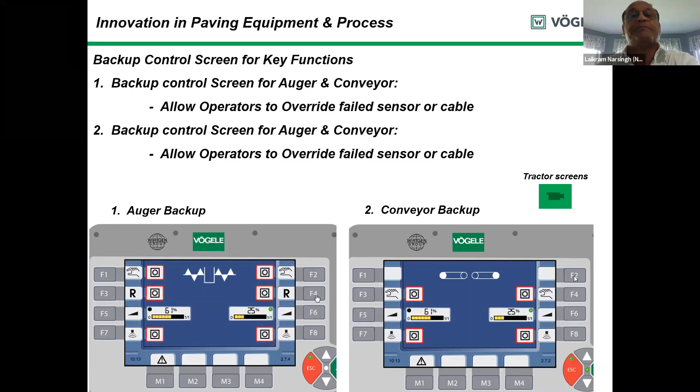Integrated machine, integrated grade and slope control built into the machine today. All of that comes with intelligent machine control. The same control can allow you to interface with Topcon, Leica, Trimble, and Pave 3-dimension, which I'll get back to and talk about later. With integrated machine control, you have a split screen. Your operator on the left can see what your operator on the right is doing, or vice versa. The left guy could control the right, or the right could control the left. If you don't like that, you can turn it off so that the left controls left, the right controls right.

Again, you have your desired grade and your actual grade. So when your actual grade starts to deviate from your desired grade, the machine will make a change to bring the actual back to your desired. You can also set your slope. So rather than going down constantly with a smart level, you can monitor your slope on discrete control.

Everything built in. You have enough storage on the pavers to keep your cables and your sensors. Your brackets usually stay on the end gate. It takes 2 minutes. Grab your cable, grab your sensor, hook it up, hit calibrate, and in less than 30 seconds, you could be paving in automatic mode. One of the reasons why many operators don't like to use automatic grade and slope in the past is because it's too much work to bring a suitcase on board, on site, hook up all the cables and the junction boxes and the controllers, calibrate it for the different settings, whether it's valve offset or deadband. None of that is required with the integrated system because it's designed and built for that particular paver. So you don't have to set valve offset or deadband or any of those types of presetting.

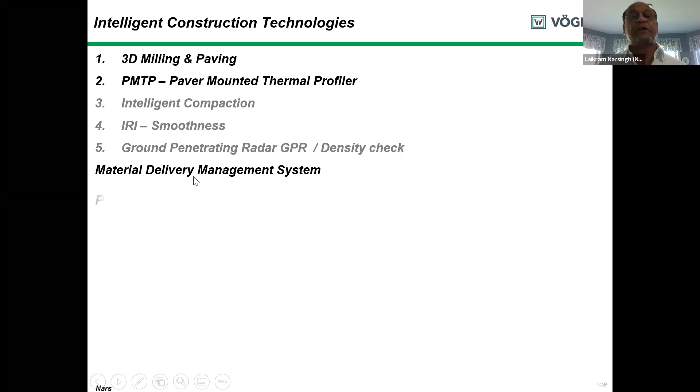So data from all these systems gets uploaded into Veta. Contractors, state agencies, and DOT inspectors will log into Veta, grab the data, and run analysis based on their needs. So the equipment guy's role is to provide data into Veta. As you'll see when we get into the material delivery management system, it will be the same software that the data from all these systems is uploaded into.

How would this benefit our industry in the future? That's what I'll try to accomplish here in the next couple of slides.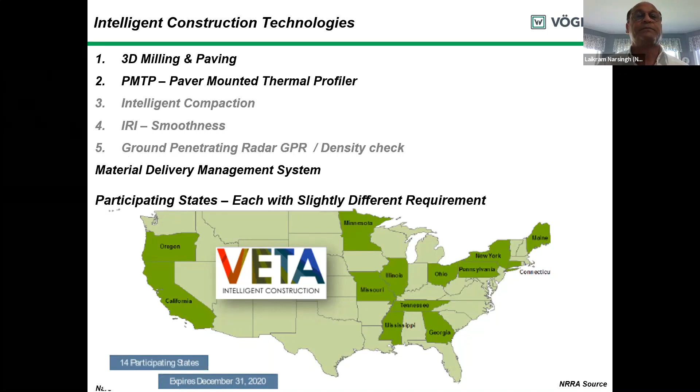First, let's look at 3D paving and milling. We can pave one dimension, which in the past controlled depth left or depth right. That is one dimension—some folks refer to it as two dimensions since we're controlling left and right, but it's really one dimension, the depth of the pavement. We can also control the width and steer the paver. That's called full 3D paving.

So what are some of the things required today to pave in 3D? Of course, it's three unique knowledge bases. Too many contractors want to go into 3D paving, grab a paving crew that's never heard the word 3D before, and expect these guys to learn how to pave 3D overnight. This is a very challenging tool, and it needs three different knowledge bases.

So what are the three things required to pave in 3D? We need machine controls—in our case, as Todd mentioned earlier, it's built into the machine control. So the first thing we need is machine control to control the toe points. The next thing we need is positioning instruments. We are not in the business of making positioning instruments—that expertise lies with TopCon, Trimble, Leica, maybe a few other guys.

Then we need a job file, which could be a 3D model. The 3D model is used with the 3D positioning instruments to tell the machine control where it's at, what the grade is, what the width is, and what direction the pavement goes. So these are three unique knowledge bases that are required: we need to know how to build a file, we need to know how to use these 3D positioning instruments, whether it's millimeter GPS or UTS, and then we need those to tell the machine control what to do.

There are two types of job files. We could have a new project, totally designed in 3D. One of the things being pushed today by FHWA is BIM, Building Information Modeling, which mandates the use of 3D design and construction for all new projects. So for new projects, we have a 3D model.

For an existing surface, TopCon and Trimble make a system—I know TopCon's is called Smooth Ride. You can mount the device in a pickup truck, scan the base, build a 3D model, plug that model back into the paver or a mill, and let the equipment follow it. We're not here to talk about mills today, but we could talk about pavers. So once we have the model, we feed it back, in this case, into a TopCon control box using TopCon GPS receivers to tell the paver where it's at.

Now the 3D model coming from the TopCon controller will tell our sensors what the grade needs to be at that particular latitude and longitude. Our sensors take that information, drive it back to the machine control to control the toe point, and achieve that depth driven by the 3D model. That's TopCon technology, not Vögele technology. For more information on that, reach out to your local TopCon dealer.

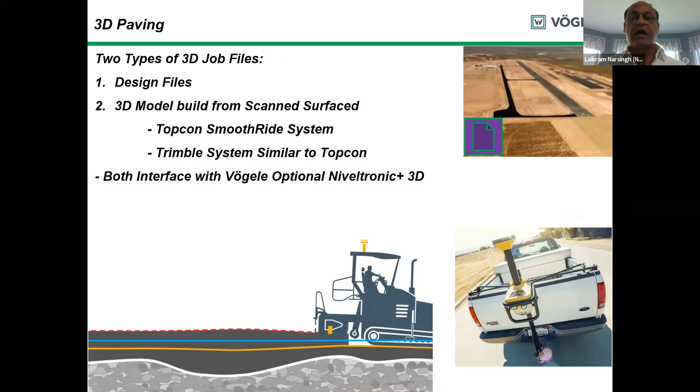But that will make it easy. In the past, we would either mill it or do a leveling course. If the foundation is good, we can use this system and lay some more asphalt where there's a low spot to compensate for roll-down, giving a smoother final product without needing a leveling course, or in some cases without having to mill it. You can take the same system and use it on the mill if you have to mill it. So that's the second way of building a 3D model, whether you use it on a paver or a mill.

Let's look now at the material delivery management system. It's AASHTO MDMS e-ticketing, an expansion of the e-ticketing system. This is currently being worked on.

Myself and Todd are involved in some of the review committees on this system, so we know a little bit more about it today.

These are 5 different areas where information will be flowing into VETA. If you look at the fleet data, there's the dump equipment identification number, a geofence on the plant, a geofence on the job site that shows where the truck is at, and also GPS in the truck that you can monitor the truck from the plant through its route to the job site. Also the date and time where the truck dumped, and the latitude and longitude to where the truck dumped. So we can monitor that truck from the plant all the way to the job site. Shows exactly where it dumped.

Now, if we use a material transfer, the dump location may not be exactly where the machine is, where the asphalt is laid, but in this specification, I think it's a 200-foot accuracy that's expected relative to dump location.

Then we have, of course, the data that will be entered by the agency, which means your DOT inspector on the job site, a whole bunch of stuff. We're not going to cover the details there. These are stuff that the contractor has to enter. You notice 2 important pieces of information: material temperature and air temperature. Now, we already have a weather station mounted on the paver that gives you that information without having to manually enter it. So these are all information that the contractor has to enter.

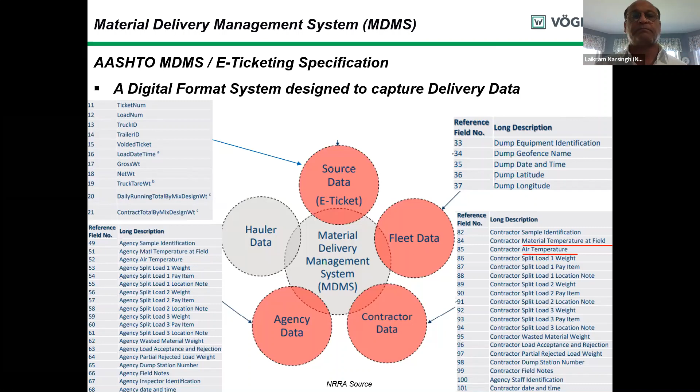Now, why is it called material delivery management? As I said earlier, we want to ensure consistency in temperature. We want to achieve that. We have to ensure consistency in the material delivered to the paver so that the paver does not have to stop. Again, that will ensure consistency in the pull force, which is one of the 5 forces that holds it to grade. So the material delivery management system ensures consistency of the material supplied to the paver, ensures that the material meant for that particular job is dumped at that job location, and also captures all this information in an electronic file that could be shared among systems. So it's a digital format system designed to capture delivery data.

Now, this data is in a sharing format. So we have all this data—what else can we use it for? So here is your material delivery management system. Data is being stored in the cloud. The VETA database is used for analysis of their data, but VETA is also used for analysis of the intelligent construction technologies.

So the material delivery management data would be flowing from paving equipment to the cloud database or MDMS database, plant into the cloud, hauling equipment, e-ticketing. The agency will be sending information into it. Contractor will be sending information into it. But we also have the intelligent construction technology sending information into the VETA database. So now we have all this data. Say, for instance, the paving equipment guy can go back into the database, pull information from the truck, and be able to provide to you more real-time as-built information, because now we have all the data.

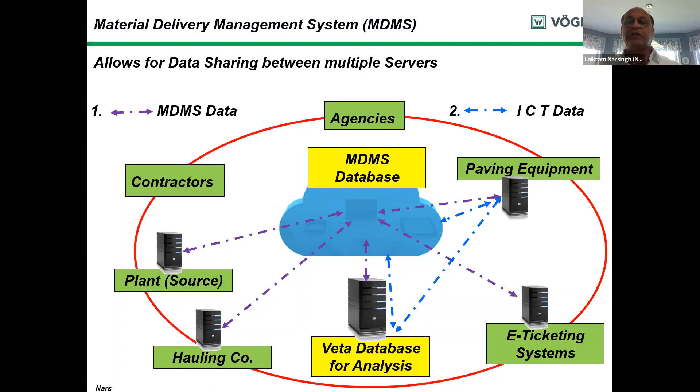What else can we use the data for? I'll show you some of that in the next couple of slides.

But first, looking at the paver mounted thermal profiler—a thermal camera mounted on the paver, looking 6 feet behind the screed. We have a weather station mounted on the side that gives you all your weather information. We have a temperature sensor mounted in front of the paver that gives you your ground temperature. So the thermal profile displays in front of the paver operator, so he can monitor that profile and raise a red flag if he sees anything suspicious.

So this is a data collecting tool. We do some analysis and give you a thermal profile, but there's much more analysis that is required by every state, some of which are a little bit different.

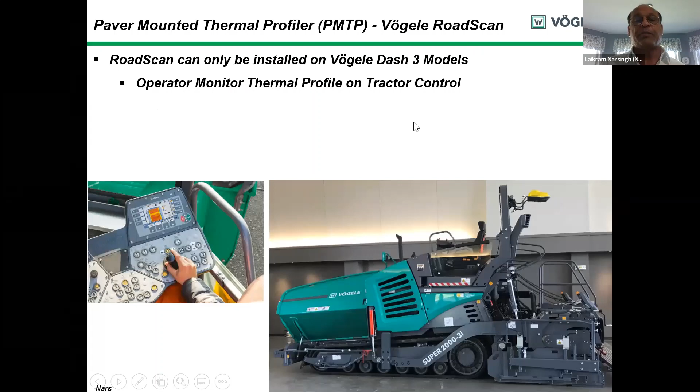The thermal camera, or in our case called a RoadScan, could be mounted on any Vogele Dash 3 models, where again the operator gets to see the display right in front of them.

Camera is easily mounted because it's plug and play. All the connectors are already part of the electrical systems. Speed sensors are part of our ErgoPlus operating system. So all you have to do is plug the camera in and turn it on, it takes 2 minutes, and you're ready to go to work.

The tractor operator can start and stop the camera right here, and it gives them the display up there. So that is collecting data. Now we have the data, what will we do with the data?

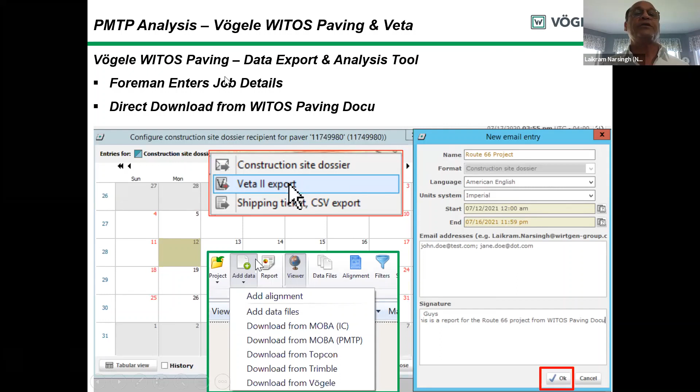So like I said earlier, Veta will be analyzing the data for different states. But we have a system called WITOS Paving, where WITOS Paving does its own analysis and gives the contractor more information to improve his process. So the foreman enters the details, and we have direct download from WITOS to Veta, so inspectors and everybody else can use the Veta analysis.

So here, an operator, foreman, or supervisor could go to WITOS Paving, which is on Vogele server or Wirtgen server. Select a date. Now the project could be several days, so you select a start date and an end date. That will be done over here.

You enter your project name. You enter an email address for anyone seeking this information, whether it's a state engineer, an inspector, a foreman, or your supervisor, whoever the case may be. You enter their email address there. Any notes for that particular job.

And you can start the project on the paver, or you can start it on a smartphone or a tablet. The paver creates a Wi-Fi using a TCU within a 250-foot radius. So the paver talks to this smartphone or tablet that's within 250 feet. That information gets sent by the TCU to the Wirtgen server.

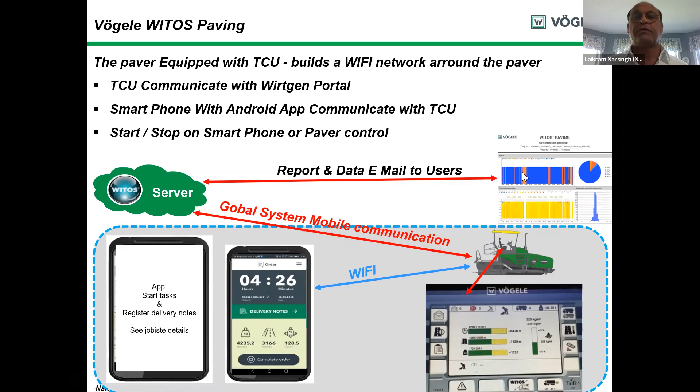At the end of the day, when you hit end and the project is finished, whoever's name is on the email instantly gets a report that shows certain information. So once you hit end, you get 3 pieces of information. This one shows you your paver performance, which I'll get into details shortly.

This one shows you your thermal profile, which will be the WITOS thermal profile analysis. The same information exported to Veta will give you the Veta analysis as required by different states. And of course, your trucking information.

So your paving information will really show you, the blue shade is paver active, meaning the paver is paving. The red shows you sitting in pave mode, which means you're waiting on trucks. The light blue or orange shows you whether you're moving into position in pave mode, or traveling to the job. So at the end of the day, you can look at your paving process in terms of paving time and idle time. You can get the same information with your truck information.

So without duplicating the effort, we'll skip that.

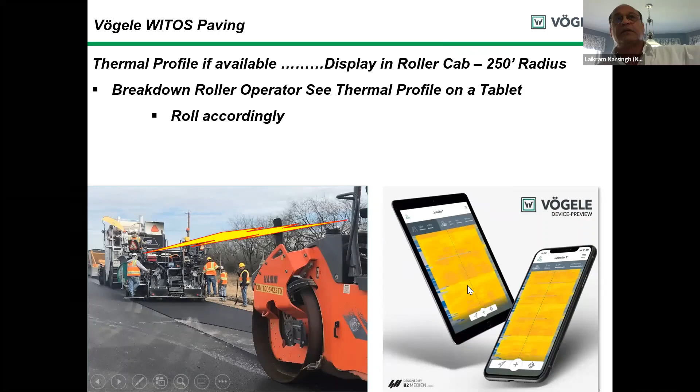At the end of the day you get that report, but during the paving process, if you have the thermal camera mounted on the paver, you could put a smartphone or a tablet in the roller cab with the roller operator, and he can instantly see the thermal profile that the tractor operator sees, and then roll accordingly.

With the MDMS database now, we can grab the truckload information because that's data sharing. We can grab the truckload information to our server.

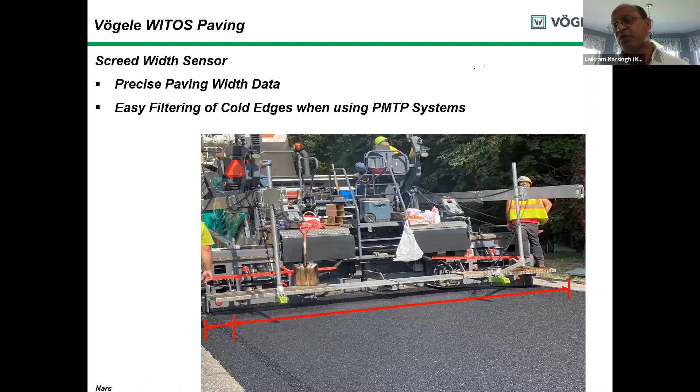We could put a screed width sensor on the paver that tells you exactly how wide you're paving. We know our width, we also know our depth. That's plugged in now, but in the future we could put sensors in there and know precisely how deep we're paving.

We can show you a thermal profile with the exact position of your screed because of the screed width sensor, so you see the exact profile, and you can trim off a certain amount, as some states require that.

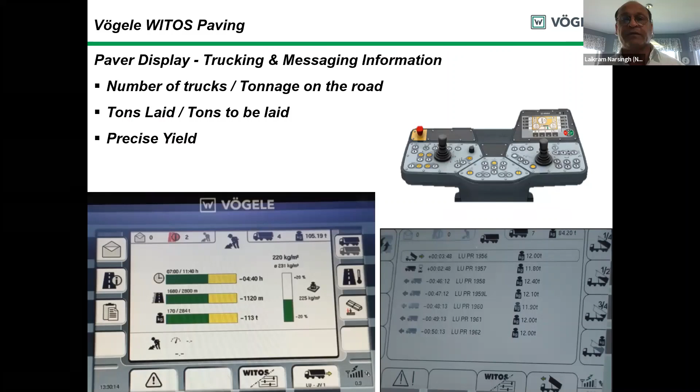And we can display in front of the operator how many trucks he's got sitting in front of him, how many tons are paved, how many tons are left to be paved, how many feet are paved, how many are left to be paved, and we can give him more real-time yield. The foreman sitting in his pickup truck, or somebody in the office, could see all this information real-time. That's as-built information.

So at the end of the day, we make your life easier. You don't need to collect any tickets anymore, especially with COVID. We eliminate the tickets. You don't need to roll and get your length of paving. That's all built into the paver distance control. So we know exactly how wide, how fast you're paving, what distance is paved.

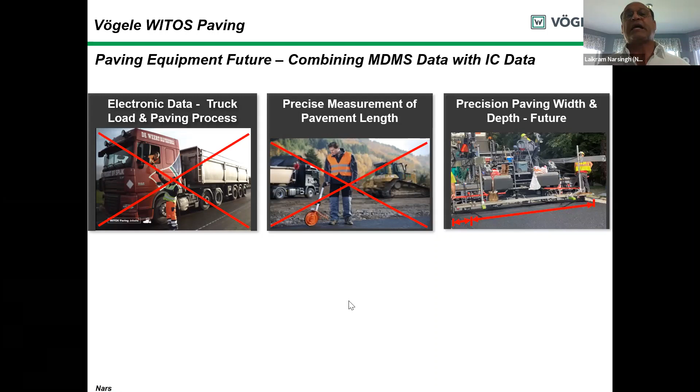We also know the exact screed width because of the screed width sensors. We could display that information in front of the tractor operator for the foreman. At the end of the day, we give you a report that helps you analyze your process and improve for the next day or the next project.

And of course, we can help the roller guy do a better job because now he knows where his cold spots and the hot spots are.